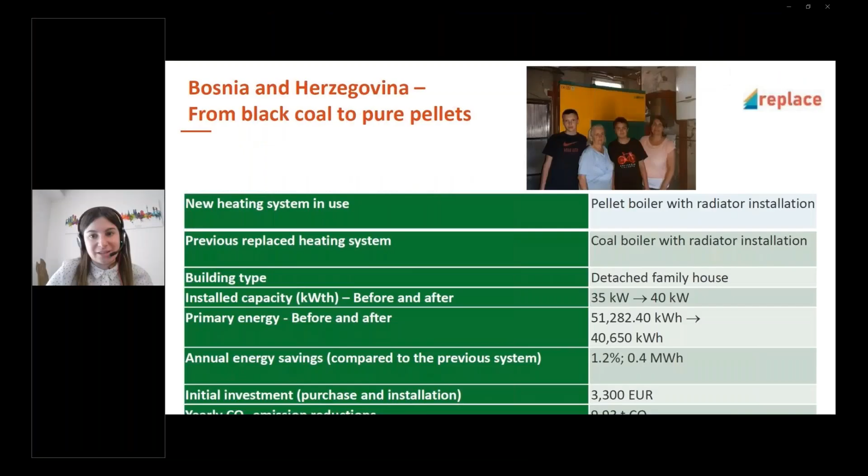Our editorial board is organized around the topic of the month, which allows us to dig deeper into specific themes. Each month, several items are produced by Build Up, such as overview and technical articles and infographics, but that's not all. Build Up also offers the opportunity to host webinars on topics related to energy efficiency and renewable energy in buildings. More recently, Build Up has opened the opportunity to distinguished experts in the field to share their knowledge in front of our cameras in our Build Up expert talks.

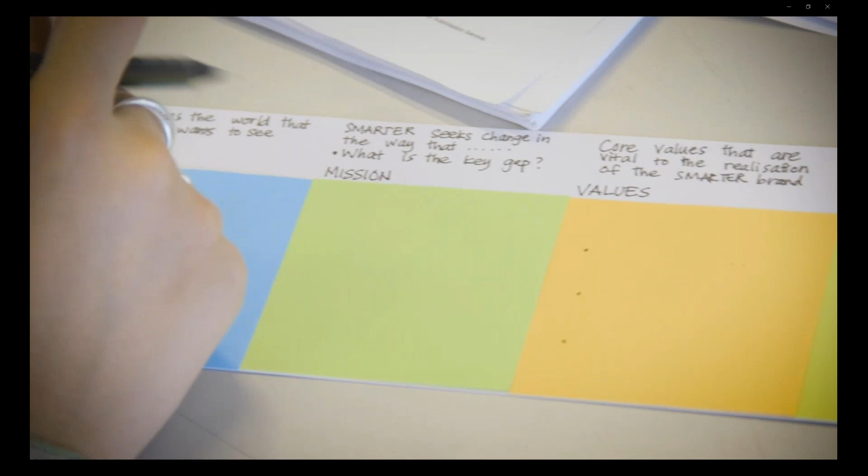The Build Up portal shares daily the most relevant events in the field of energy efficiency and renewable energy. But we also participate actively in many European events around the year, such as EPB Center and RIBA conferences, Horizon 2020, Interreg and COST Action events, Covenant of Mayors, and more, with the aim of further disseminating the results and helping to create high-quality media content. The Build Up portal is updated daily, reaching around 120 new items each month, including news, events, publications, articles, and video content.

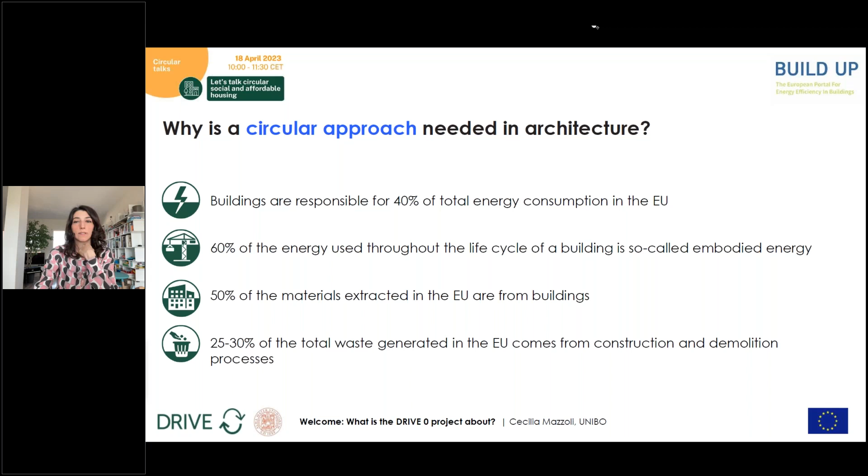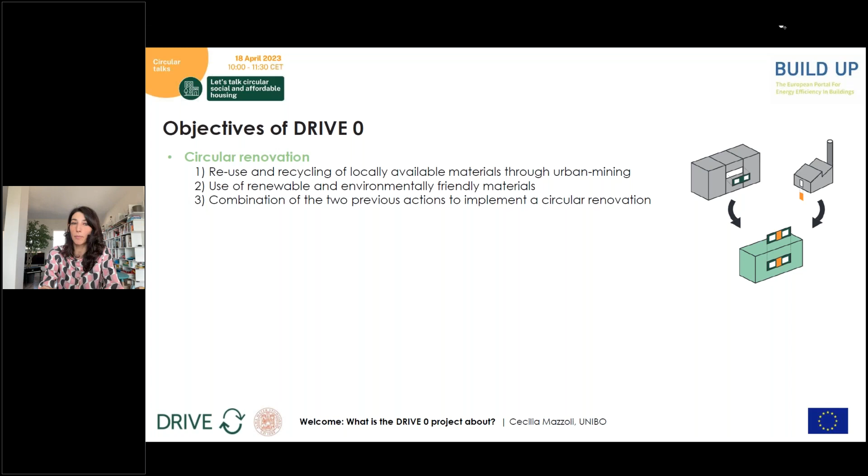Going to the other slide, so shifting to the main objectives of the Drive Zero project, the project aims to promote the adoption of a circular approach in renovation processes, which in order to be attractive and effective must be based on real customer needs. This approach is based on the reuse and recycling of locally available materials through urban mining processes and the use of renewable and environmentally friendly materials. Then another important goal concerns the development of new consumer-centered business models that, as we will see from my colleague Professor Agliardi's presentation, enable the transition to circular economy processes.

In addition to the achievement of technical innovation goals, a key aspect relates to providing clear and accessible information and increasing awareness in the field of energy performance for the occupants of the buildings to be renovated, and in general for all citizens that are non-experts in the field.

Last but not least, the project is testing the developed innovative construction products and systems, as well as the circular strategies, on 7 selected demonstration buildings located in 7 different countries belonging to the consortium. More precisely, Estonia, Greece, Ireland, Italy, the Netherlands, Slovenia, and Spain.

Here you can see the location of the pilot cases and a picture of the pre-renovation state. All the buildings were selected because they are representative of a typical building typology in the country, and therefore they have a high potential for replicability, for the reiteration of circular renovation actions. So this was very important for the project.

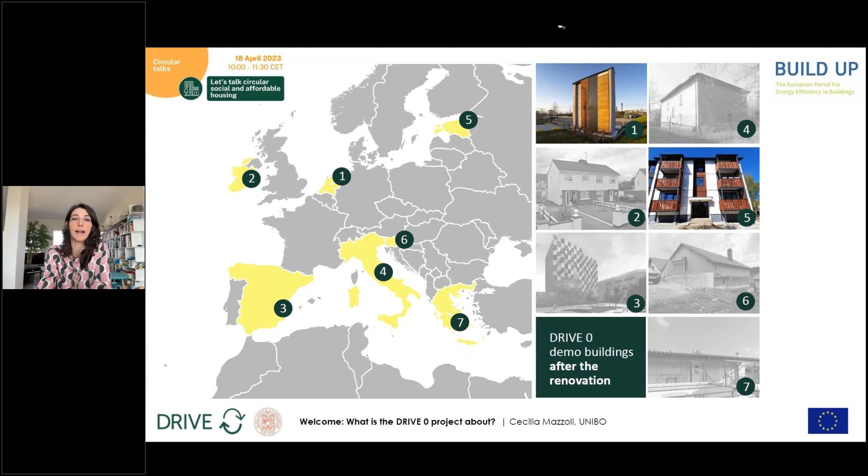Today, you will see the presentation of the innovative facade system developed by the industry Weibo for the Dutch pilot, number 1, and also the renovation intervention developed for the Estonian pilot, number 5, which will be presented by the industry Timbeco and Taltech, the University of Taltech.

What about the other demos? In the first webinar of the Circular Talk series held on 28 March, which was co-organized by Unibo and the Architects Council of Europe, we presented the Italian and the Irish pilot cases. So today we will present the Dutch one and the Estonian, and I invite you to attend the third and final webinar of the series that will be organized by Unibo and by UIPI, that is the International Union of Property Owners.

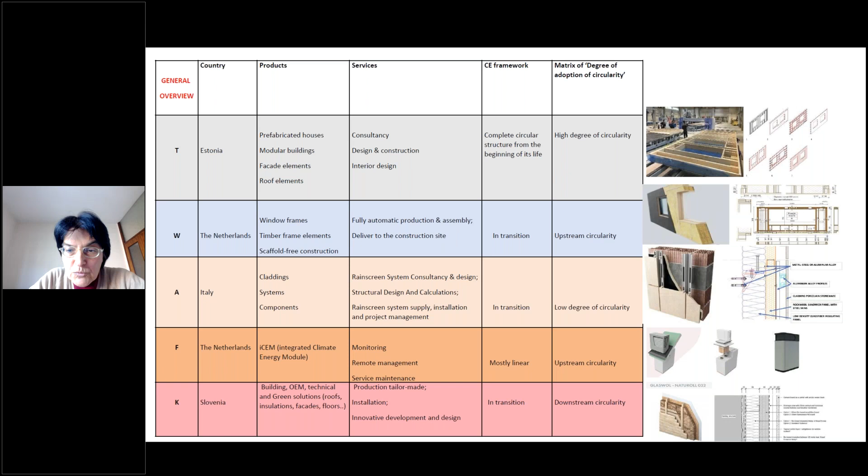Just to conclude, because time is running away, I ask you to go to the next slide. In particular, here you will have two of the companies which are going to explain to you in a minute the achievements. So just in terms of a main takeaway for authorities, local authorities, mainly facilitators, professionals, and occupants, we have to focus on, of course, circular materials, product service systems, the product characteristics, as I already said, but also in terms of sharing platforms, different types of contracts, but also cooperation with customers, suppliers,

and the whole circular business network, because our purpose would be to create stronger networks where we may share our services, products, and of course for that to build awareness, we need to create incentives, environmental, economic, and social incentives to build awareness in society. There are already very good practices and success stories, and now I wanted to stop here because we already have Drive Zero success stories, and in particular, Timbeco and Weber are these types of stories that you will listen to shortly. Thank you very much.

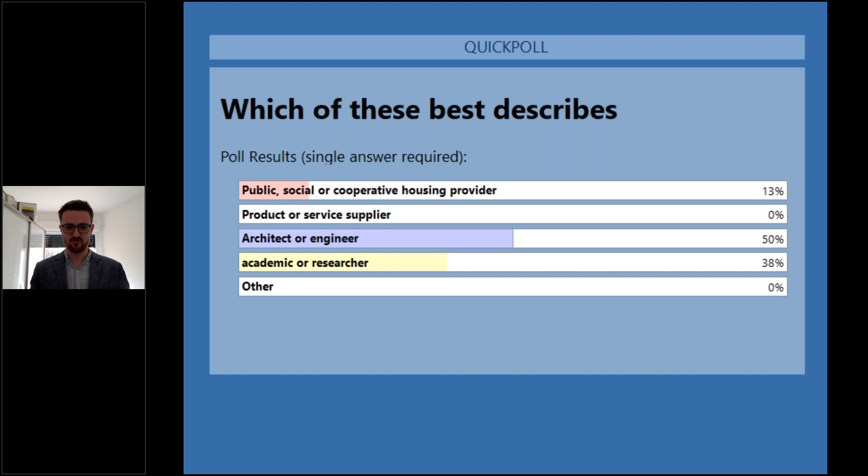And on to the final question, I think. And again, this is a question about your own personal day-to-day life. So not the company or the organization you represent, but just you as an individual. So this is multiple choice. You can click as many as you want. And the idea is just in your day-to-day life, how you may be living a more circular lifestyle.

So for example, are you buying secondhand clothing? Are you recycling, as you should be, paper, plastics, and metals, and so on? Are you composting organic waste, either at home or at the municipal level? Are you, for example, reusing coffee mugs, water bottles, all the things that kind of avoid that very small waste that we generate? And are you using renewable forms of energy, either at home or in your office? So again, you can pick as many options as you want.

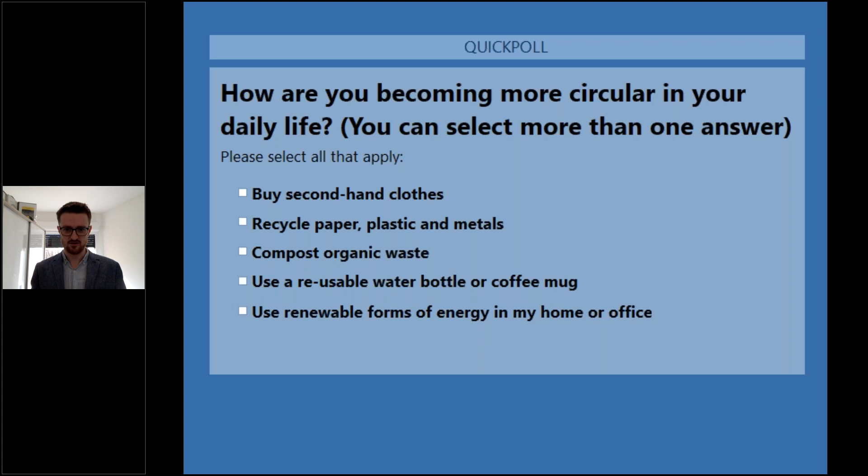Okay, maybe we can have the answer to that question as well. Okay, so indeed, not surprisingly, people on this call are relatively sustainable and circular in their day-to-day activities. The one that I see there, which is interesting, which is maybe a bit further down, only about 38% of you are using already renewable forms of energy in your home or office. So clearly that's something that even amongst this cohort, which is perhaps more circular than the average member of the population, there's still room for improvement in terms of the energy consumption that we have within our homes.

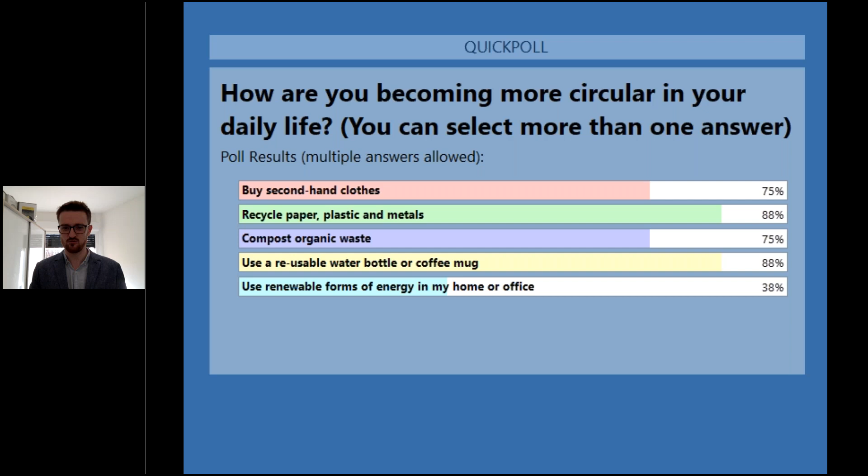Okay, so now that we know a little bit more about who you are and who you represent, and also what you're doing to be more sustainable, we can move on to the next section of our event this morning, where we're going to hear from two people who are representing the Estonian partners within the project. So first off, we're going to hear from Targo Kalamees, who is Professor of Building Physics at Tallinn University of Technology, TalTech, who's going to discuss some of the pains and gains of using circular solutions in apartment associations. So Targo, the floor is yours.

Yes, you see, and hopefully you also hear me. And this presentation is about using circular renovation solutions in renovation of an apartment building. This is an example from Drive Zero project, where we renovated several projects by using circular renovation principles. Next slide, please.

And here we can see this pilot building. This is a three-story apartment building which has 24 apartments. It was constructed in 1986, and the energy performance certificate was class D before renovation, and it was renovated to a nearly zero energy building, which is class A. So the building fulfilled European Commission energy performance targets after renovation, but basically this is not enough to reach decarbonized building stock. Next slide, please.

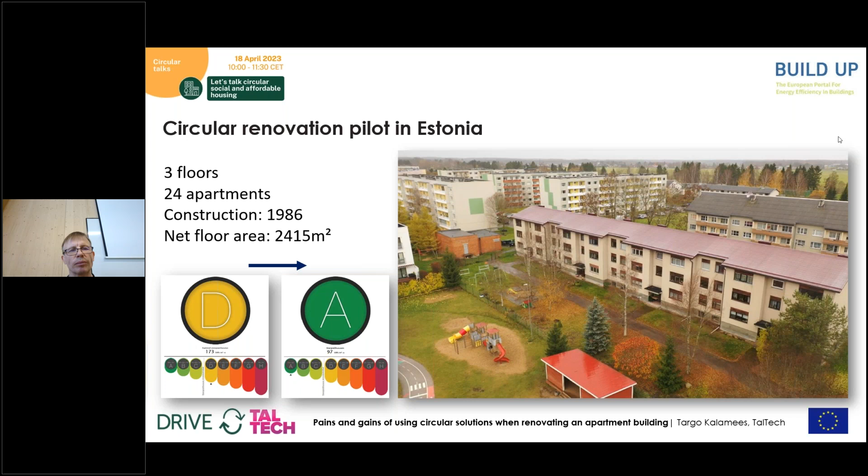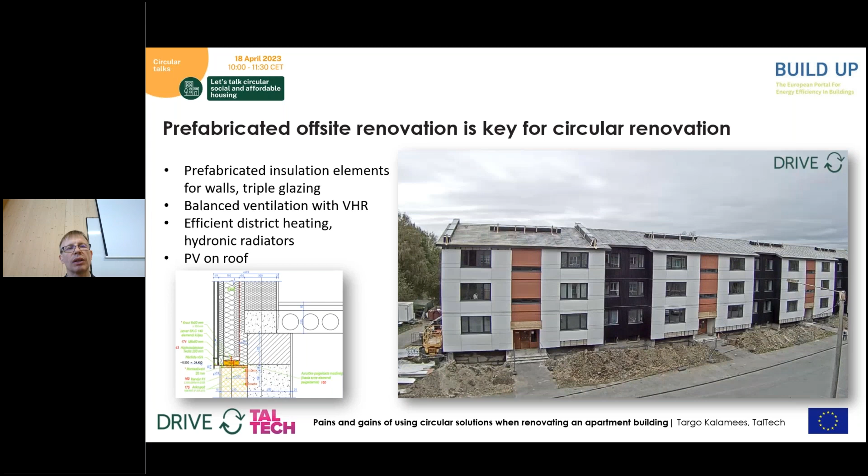And we used prefabricated offsite renovation for this circular renovation. We may say that this prefabricated renovation is the key to achieve circular renovation. We used insulation elements that were produced in factory conditions and installed on site. We used triple glazed new windows. There is a balanced ventilation with efficient ventilation heat recovery and efficient district heating to provide heat for room heating. And there are PV panels on the roof.

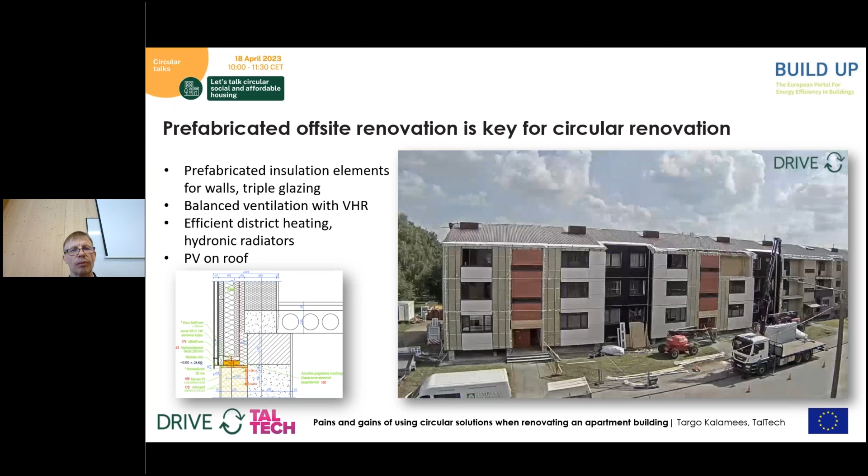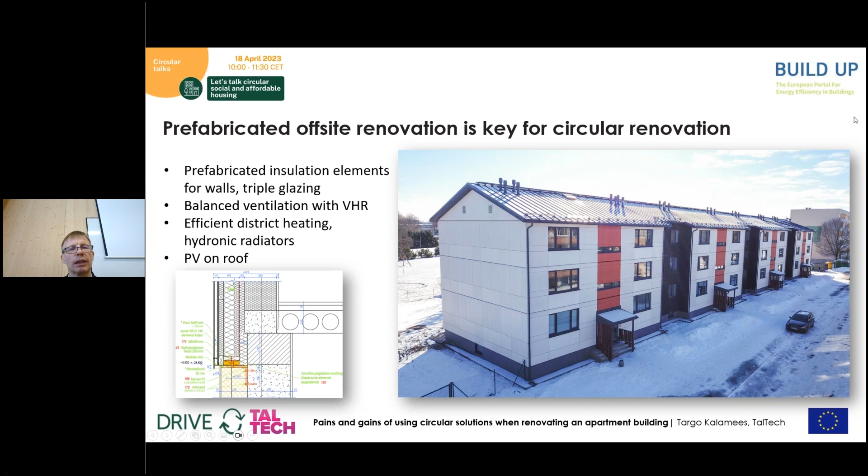Next slide, please. And after the renovation, the building looked like this. And on the next slide, you can see that on the top of the roof, there are also PV panels. When we designed the circular renovation solutions, yes, next slide.

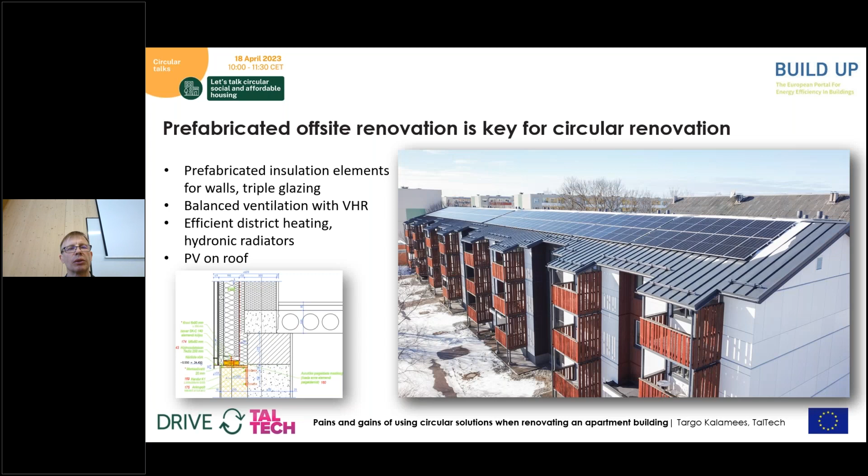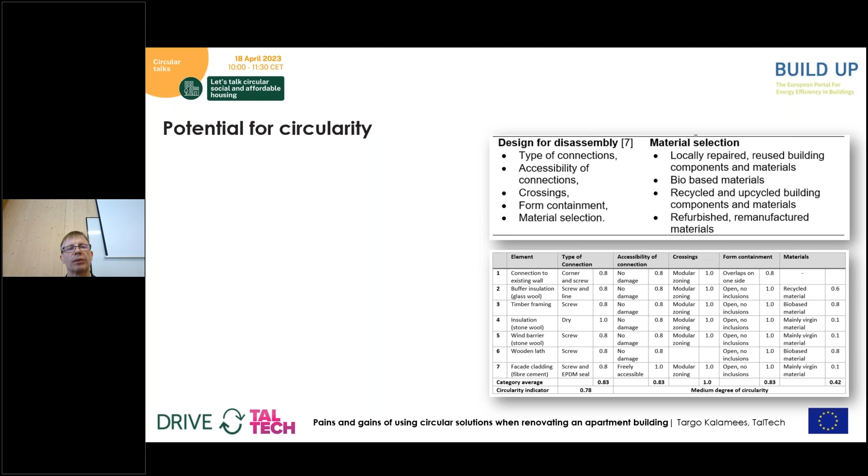Then we assessed the circularity, and we used several criteria. We analyzed the type of connection, we analyzed the accessibility of connections, we analyzed different building envelope material or component crossing, and we analyzed where the material is coming from. And basically, we may say that the medium level of circularity was achieved. Next, please. Because there were not too many crossings, and connections were very circular.

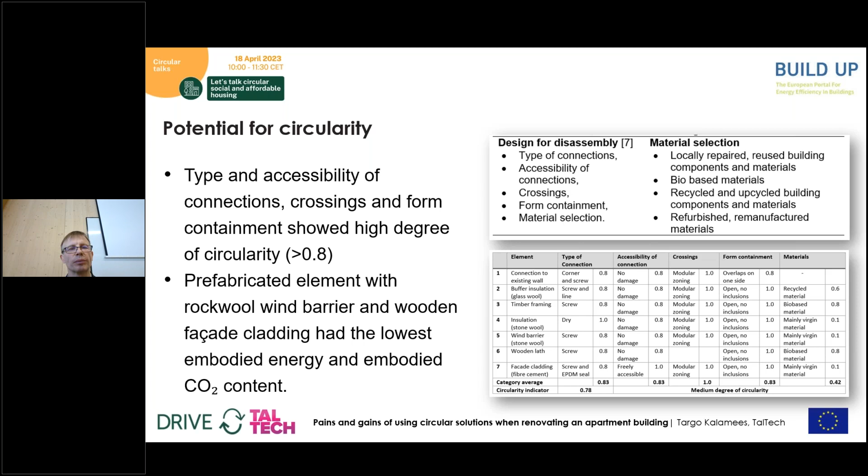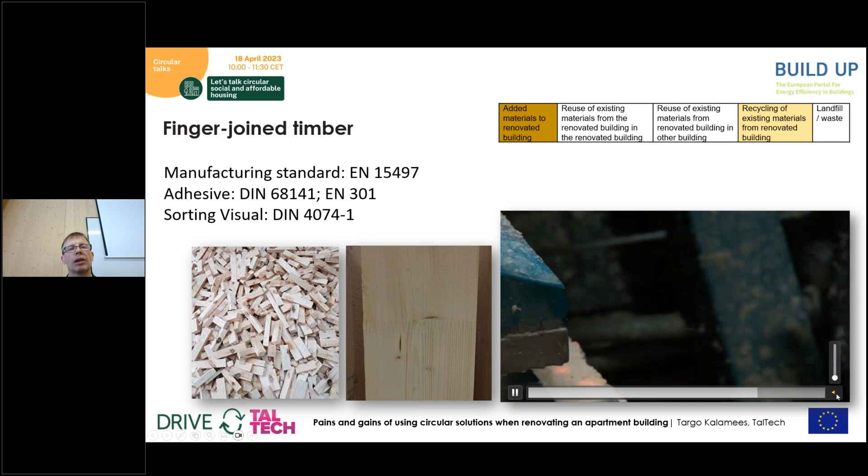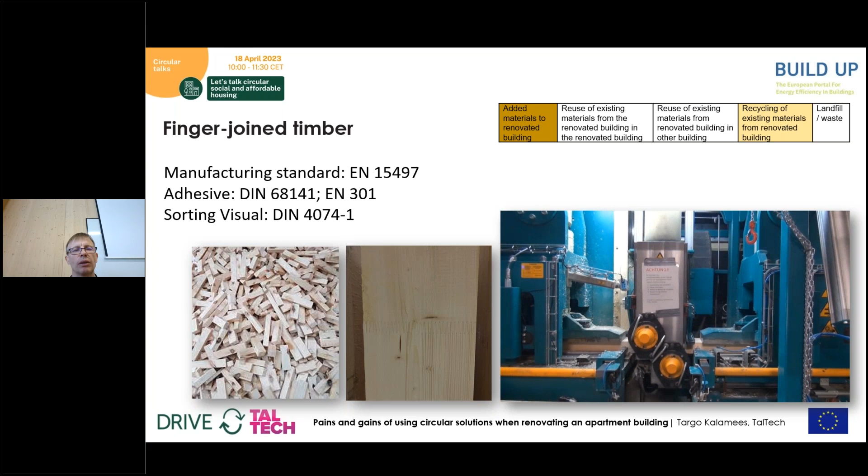And in following, I will show you some circular components that we used in this building. And these are divided into different classes. We analyzed added materials to the renovated building. One example is finger joint timber. When we produce timber frame elements, we will have a lot of materials that we cannot use as enough length timber. But by using this finger joint solution, we can glue them together and use a longer timber. Next, please.

Then another solution is that we can use recycled material, and we used it for attic insulation, blown insulation. It could be mineral wool or cellulose insulation, but basically using this recycled material minimizes the need for new mining. Next, please.

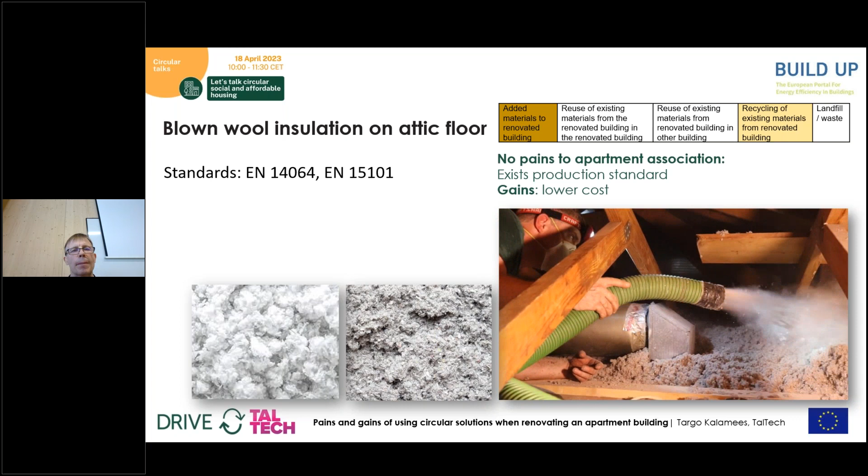Then we installed a prototype for the insulation element, and we removed the element after the testing period, and we opened the timber frame element, and we checked how much material we can use later to install into a new insulation element. And we may say basically that about 60% of the materials were possible to use after removing the insulation element. Next, please.

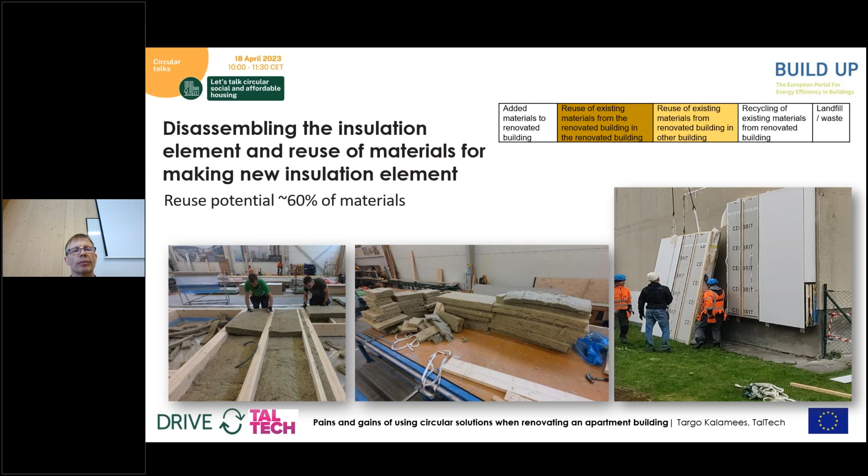And also some of the windows were reused in practice. Old windows in the Estonian cold climate are usually double windows, but this is not enough to minimize the heat loss. And nowadays triple glazing is a common solution. But what to do with these old windows? In our case, we used these windows for buildings which have no energy performance requirements, some summer cottages and so on.

And basically, if we think what kind of pains an apartment building association has, in practice we don't have today a material bank where the apartment association can give these windows. But hopefully this will be in the future. Next, please.

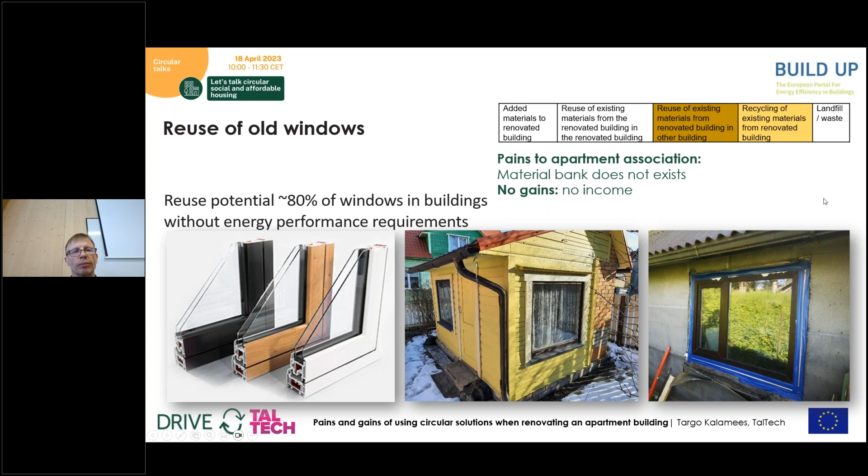And we also used old roof covering materials in some other buildings. One old farmhouse got a new roof from this renovated building, and also one storage facility got a new roof. And basically, we can classify this as reuse of existing materials from this renovated building in another building. Next, please.

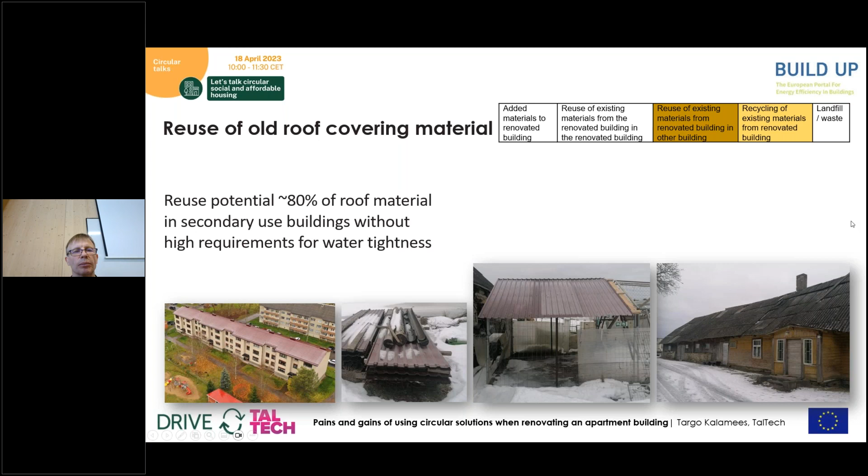And let's move now to the building service systems. Installing ventilation pipes in the insulation element gives a lot of flexibility to the apartment building and minimizes the space need for the service systems. But here is a question. If we have a shorter service life for service systems compared to the insulation element, then how can we change them if a change is needed? Together with Timbeko, we developed several solutions which we can use when we have to replace these service systems.

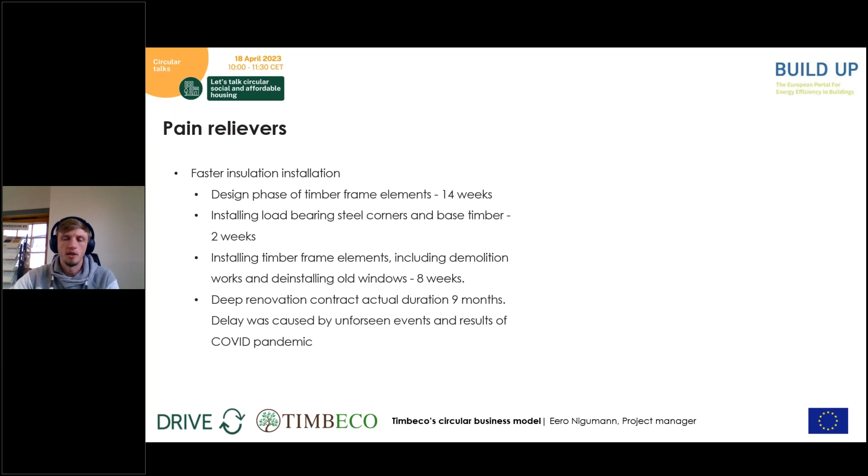The deep renovation contract altogether was 9 months. At the beginning it was planned to be 6 months, but the delay was caused by unforeseen events and also the results of the COVID pandemic. For example, the ventilation units' delivery was delayed 2 months, and there was quite a lot of other work that needed to be done after the installation of the ventilation units.

The procurement of design and construction work can be done with the same procurement, and in this case the price indication can be done before any design work has been done, so that there wouldn't be any costs for the apartment building, and the design solution would be according to budget. This results in fewer procurement processes. Otherwise, you would have to make a procurement for the design phase, then another procurement for the construction process.

And for the gain creators, the scaffoldless installation of insulation panels. The installation was done with boom lifts and a crane. The residents did not have to live behind closed scaffolding. When I discussed with another company that does these renovations on a day-to-day basis, they said that, because we also had a little bit of shortage of labor force at that time, if they had done the same renovation, the scaffolding would have been around the house for about 1 year.

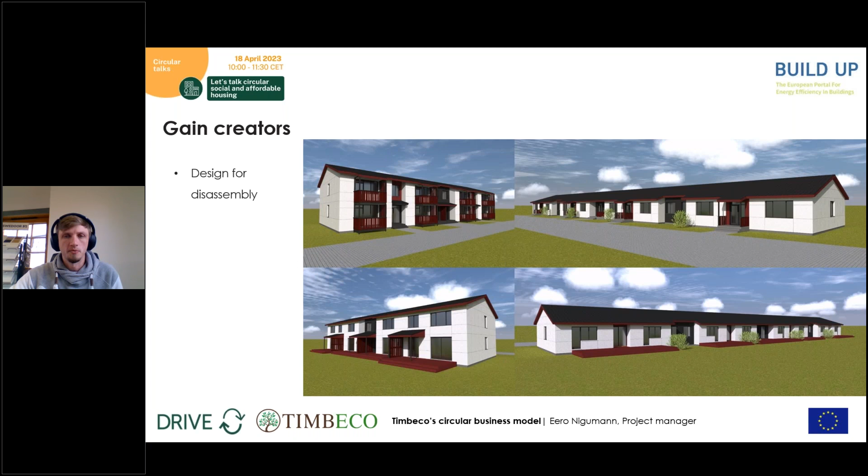And, as I said before, we designed for disassembly. The insulation panels were designed so that they could be disassembled and reassembled in some other location or on the same plot if, let's say, the apartment building goes to demolition. We made architectural designs from these panels so that you can make either a 2-story apartment building, 3 2-story apartment buildings or 3 1-story row houses. These are the visuals from the architectural design. And this is the end result.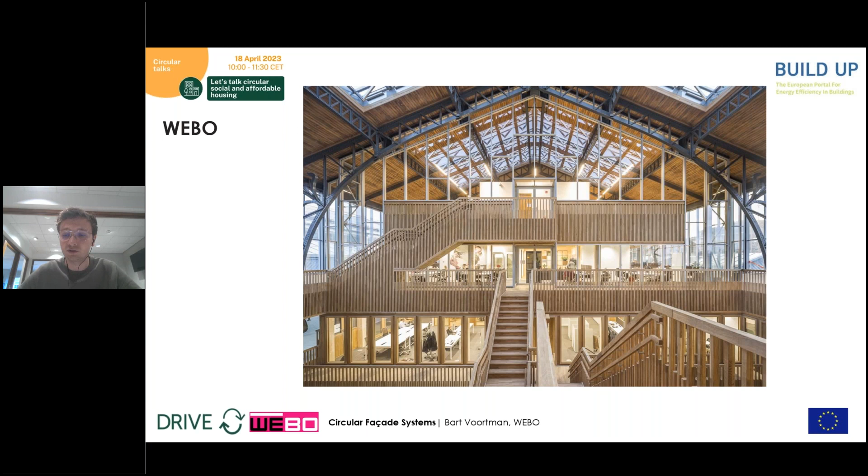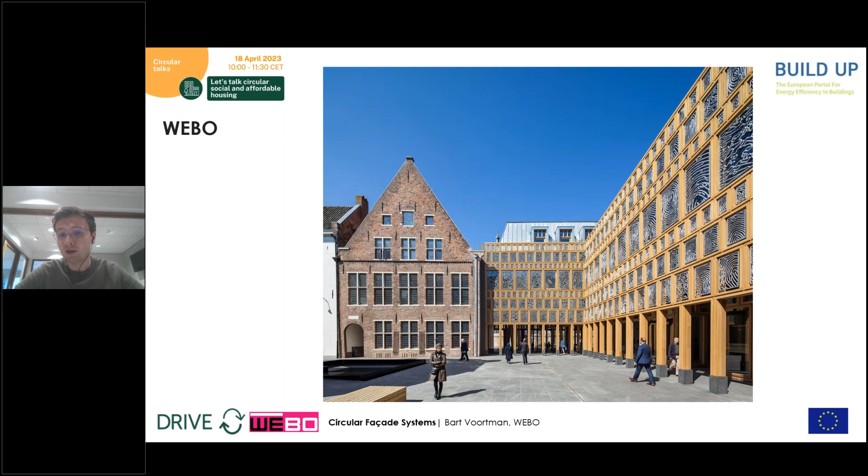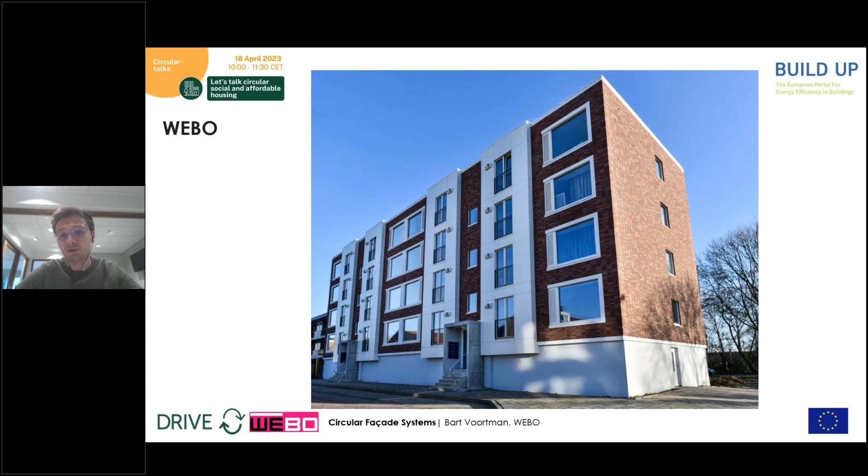Another famous project that we did was a municipality building. This is an award-winning renovation, and we produced these 4,000 oak window frames. We also do some more normal stuff, like these facade systems for a hospital in the Netherlands. And most of the time we produce even more normal stuff. This is an example of social housing association flats that we renovated with our facade system and our wooden window frames.

We have been doing this for quite a long time. This is an example of a dwelling that we renovated in 2014, which was the first net zero renovation in the Netherlands. So for quite some time we have been active in the renovation wave with our products. And within the Drive Zero project, we asked ourselves the following question: how do we make our products more circular?

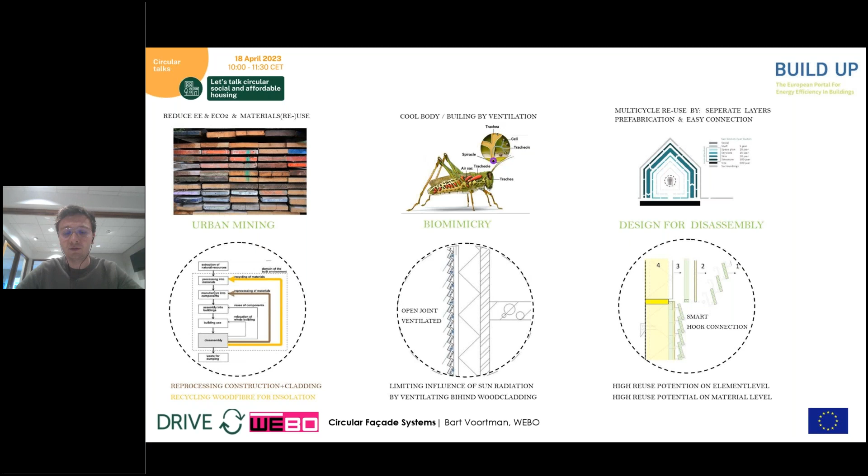And we got the following approach. We used 3 main lines of thinking. First one is urban mining. Second one is biomimicry. And for those who don't know, biomimicry is the art of looking at nature and copying interesting and good designs that nature uses and embedding them in your products. And the third and last one is the design for disassembly approach.

So for the urban mining, we looked at the area of the building, and in the area a lot of roof purlins were available, and we used those as a base material to replace virgin material when producing our facade systems. We did that in a few steps. First, we measured quality. So we checked any metals that are available. If there are metals in the wood, you can think of nails, for example, we had to get rid of them. But we also checked moisture level and so on.

From there, we started the process of sawing the purlins in the correct sizes, so we can use it for the facade systems that we produce. You can see that on the top right picture. And the sawdust that we produced with the sawing, we actually use as a sub-material for the wood fiber insulation that we used.

Some of the roof purlins that we sawed, we treated thermically, so we enhanced the quality, and after that treatment, we can use it as a cladding material, which you can see on the bottom left picture.

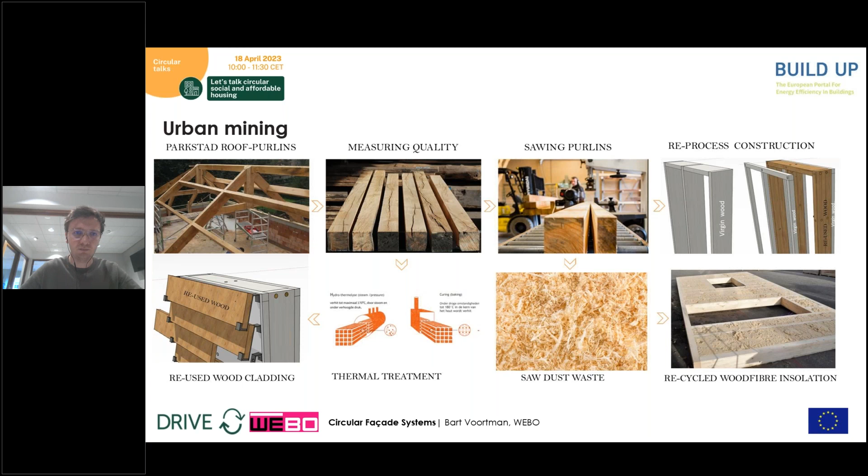Regarding the biomimicry approach, we took inspiration from grasshoppers. As you might know, grasshoppers can endure quite a lot of heat, and they do that with the system in their skin, which ventilates quite well. So they have quite a lot of cavities which allow cool air to go in and hot air to escape. And we looked at the skin of the grasshopper, and we tried to replicate that in a facade system. So typically a facade is either non-ventilated or ventilated on element level.

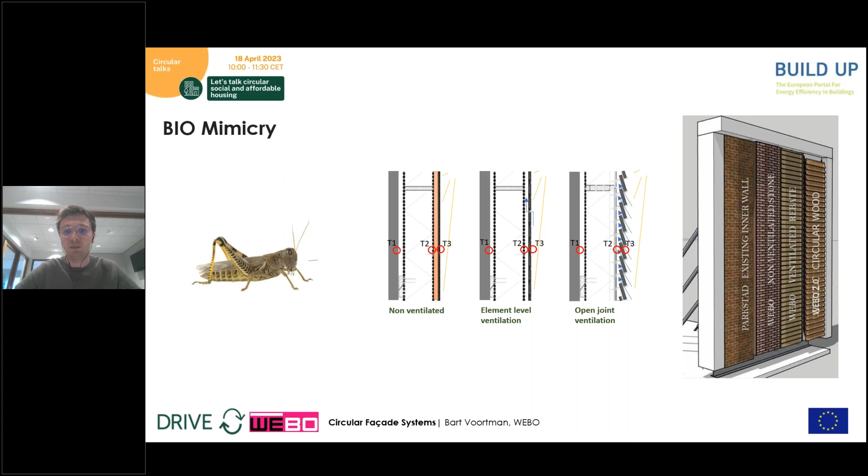And what we tried to do with the cladding, which you saw on the picture before, is to create much more cavities on the whole facade system. And this is the open joint ventilation. We replicated the skin of the grasshopper, and by doing this, we achieved much lower indoor temperatures. And we measured those temperatures. You can see the little red dots on the screen. Those were the placements of the measuring equipment, and on each of these levels we measured the air temperature, and we achieved a quite substantial lowering of temperatures by using the open joint ventilation, taking inspiration from the grasshopper.

And the third and last approach is that we, as well as Tim Becko, used the design for disassembly approach, and we did it in 3 ways. The first one, we used hook systems instead of a bolt system for attaching our facade systems to the existing structure. You can see that on the top picture. We used screw connections to attach virgin wood to reclaimed wood, so we can use them together in one product, which comes in handy if you don't have the right reclaimed wood available and you still want to make a product.

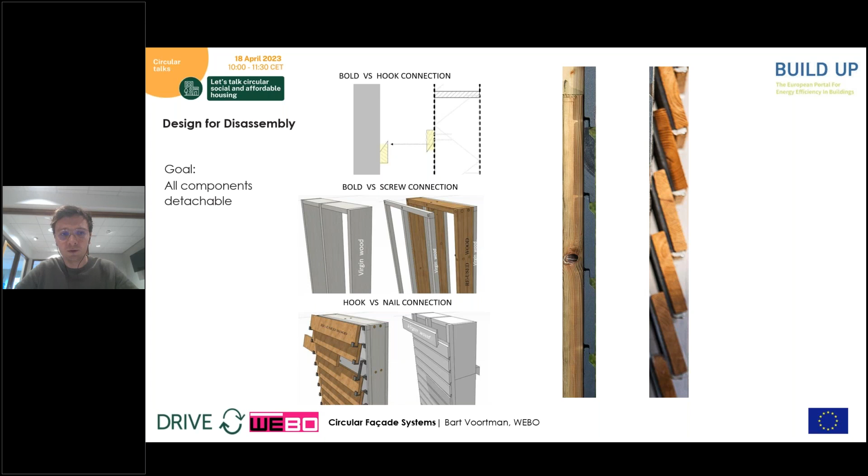And for the cladding system we used a hook system instead of a nail system, and I have a picture of it right here. This is the typical old way of attaching cladding to a facade system. Within the Drive Zero project, we use a hook system, and a big advantage is that each individual piece of cladding can be taken out. If you want to do service, or have a look inside the facade, it's no problem at all. You can detach every single piece on its own. So this is the approach that we took for design for disassembly,

which offers a lot of gains and also a lot of pain relievers. On the detachability, the best gain is you achieve a higher value of components at the end of life, because you can disassemble them more easily, and the quality of the materials at the end of life is also better, because it's more detachable, so you have a lot more value on each kilogram of material that you get out. On the biomimicry, you can create better living conditions for the occupants inside of the building.

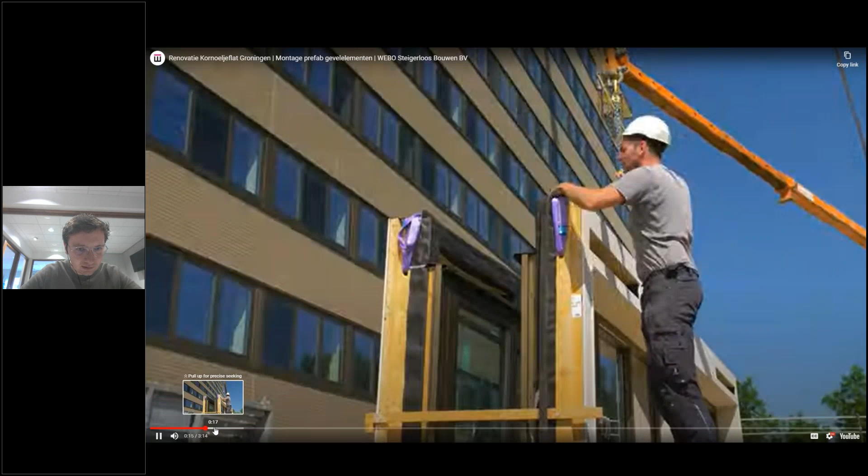And in most scenarios, we can do one entire floor in 1 week. So we can do it quite fast, and the speed of the retrofit is something that we need if we want to achieve our goals for 2050. With that being said, I want to show you some parts of a video that I hope will play. Let's skip ahead a little bit.

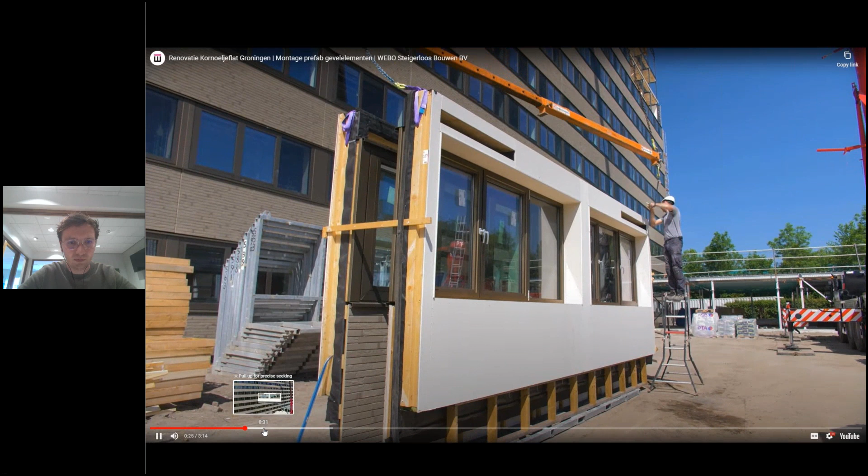Here you can see some parts of the craning being carried out. And what you can see over here, you have a crane operator and you have somebody down below attaching the facade system to the crane, and you have 2 people inside of the building that do the complete assembly. So with only 4 people, you can do an entire floor within one week.

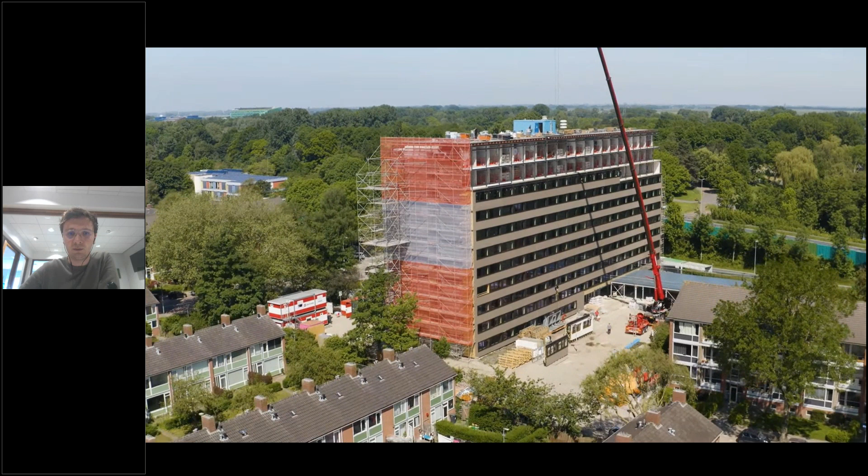And this is a speed that we really need if we want to achieve the goals that we have set ourselves for 2050.

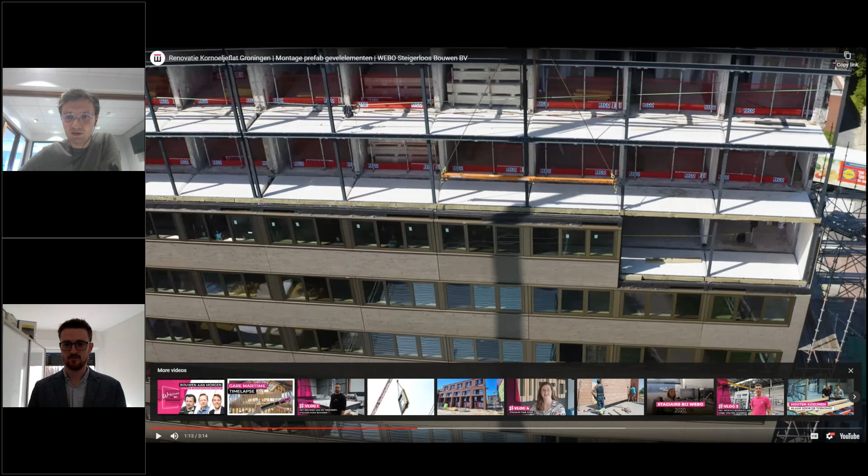So I'd like to bring back in now all of the panelists we've already heard from for a quick and hopefully dynamic discussion. We have around 15 minutes left until the end of the session, so we'll try to get as much information covered as possible. I see a number of you have already asked questions in the chat, so I think maybe we'll take some of those questions now.

One of the issues that we often hear from social housing providers when we're putting forward this proposal for them to be more circular, particularly making use of repurposed and reconditioned materials, windows, doors, roofs, whatever it might be, is that there's a lack of certainty. And what I mean by that is that if you're designing a renovation, which maybe has 100 apartments or 200 apartments, you need to have certainty about the availability of windows and doors when you're designing the process and so on.

So one of the things I'd like to know, maybe from some of the partners from Estonia who mentioned the fact that they had used reused windows, for example, is how do you plan a project that relies heavily on the availability of a certain number of these kind of components like windows and doors? How does that work versus a more traditional renovation project?